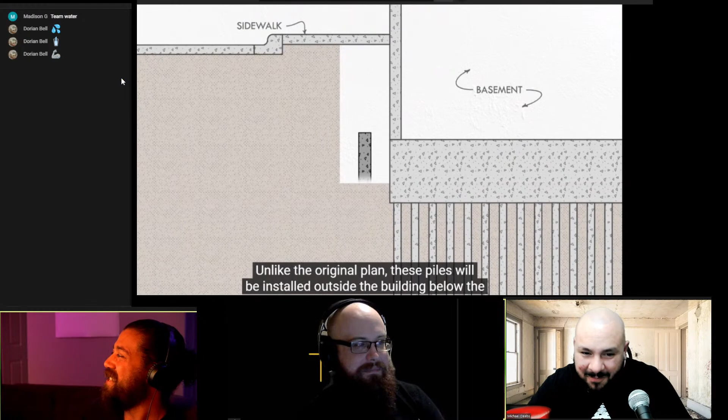52 piles will be drilled along the north and west sides of the tower, all the way down to bedrock. Unlike the original plan, these piles will be installed outside the building below the adjacent sidewalks, saving a significant amount on construction cost. An extension to the building's existing concrete slab will be installed around each pile, but not rigidly attached to them.

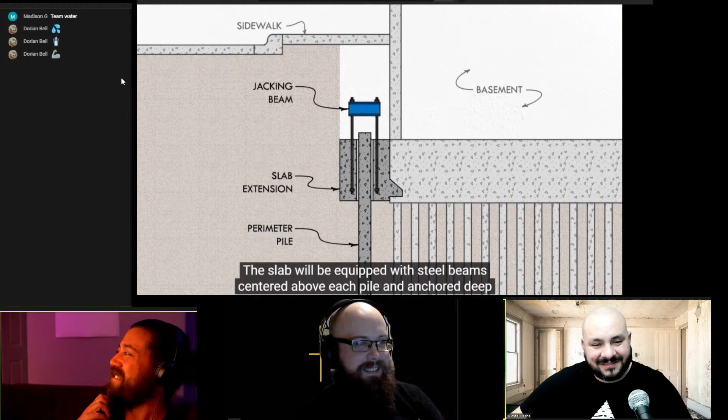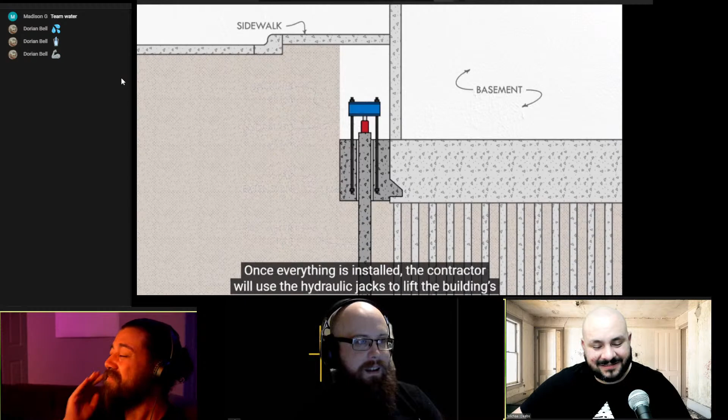Instead, each pile will be sleeved through and extended above the concrete slab so the building can move. The slab will be equipped with steel beams centered above each pile and anchored deep within the concrete. Hydraulic jacks will be installed between each of the 52 piles and beams. Once everything is installed, the contractor will use the jacks to lift the building's foundation, transferring about 20% of the load onto the new perimeter piles, meaning each pile will carry around 800,000 pounds, or 360,000 kilograms.

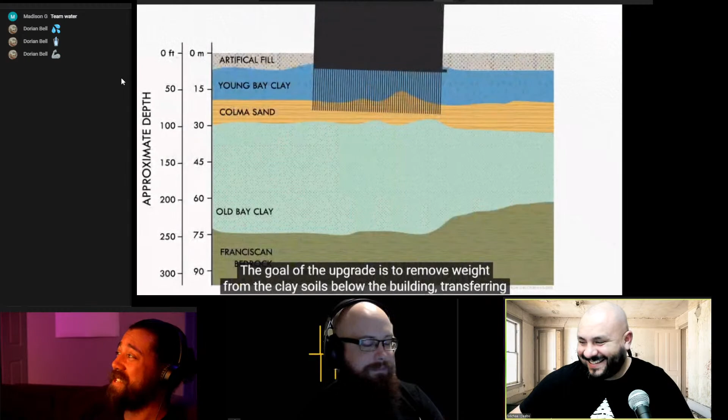The goal of the upgrade is to remove weight from the clay soils below the building. Look at this line, it just keeps going forever.

It's like almost 5 times the size of the original pile foundation. It's 75 meters, about 250 feet down to the bedrock, and that's how deep they're going to drill these things.

This also shows that they could have taken all of the original foundation pylons and done that from the beginning.

Earlier in the video, he discussed how this is normal construction in the area, so no engineers even thought to drill down further than they did for the original piles. That's what their job is supposed to be though, right? Like thinking ahead. But it's expensive. Yeah, that's what it all boils down to.

That means engineers are completely useless beyond waiting for an accident. Because after they come up with new technology, tradesmen and construction workers are the ones that actually do this shit, and they're the ones that work on the rule of thumb.

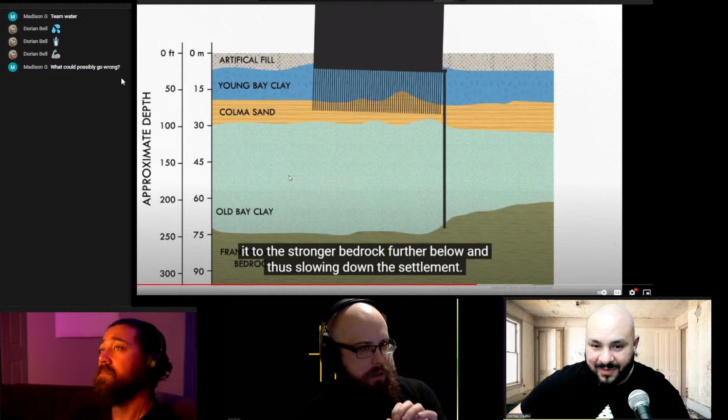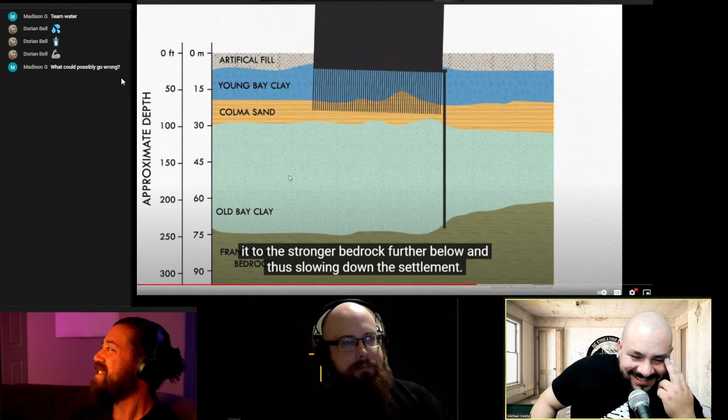The engineer of the Millennium Tower is a pedophile. Well, he's working with finance people, so none of them— none of it, no, wait hold on, I'm getting news about finance people. Are they building these? There's something going on here, guys, where they're drilling a bunch of small holes into the ground. Oh man, that's where they put the child bodies. There you go, this is a Wayfair cabinet in a building kind of thing. That's what's happening, let's continue this video. God, I'm a Q guy now, guys, I've decided it. Yeah, me too, probably.

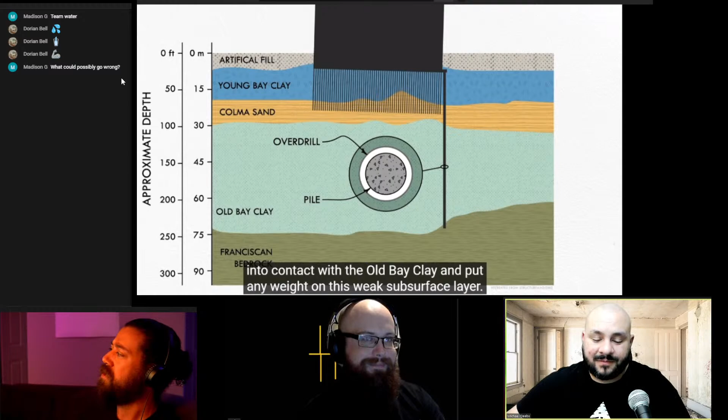Slowing down the settlement, the design requires that the holes be over-drilled so that no part of the new piles can come into contact with the old bay clay and put any weight on this weak subsurface layer. The annular space between each pile and the clay will be filled with low-strength material only after the hydraulic jacking operation is complete. Once the building is safely...

Wait, so they also have to sheathe it later? They're sheathing it with material that's just weak material. You want it to be weak so it flexes, or I guess that's the premise, but the problem is they're saying oh, we don't want the old bay clay in contact with anything. Well, the old bay clay is surrounding this entire thing, and we're already talking about a building that's experiencing shifting. I don't know, probably a problem.

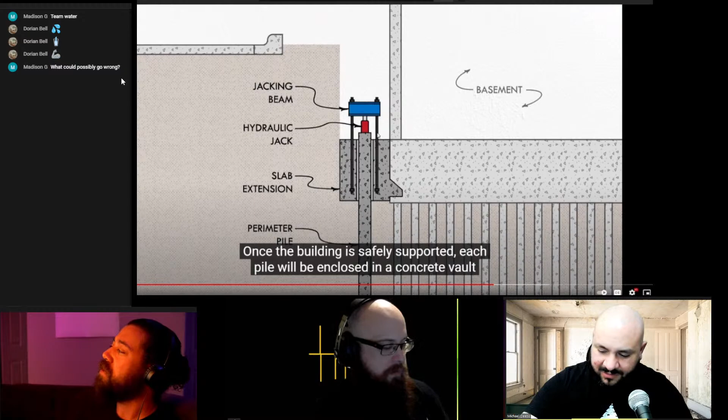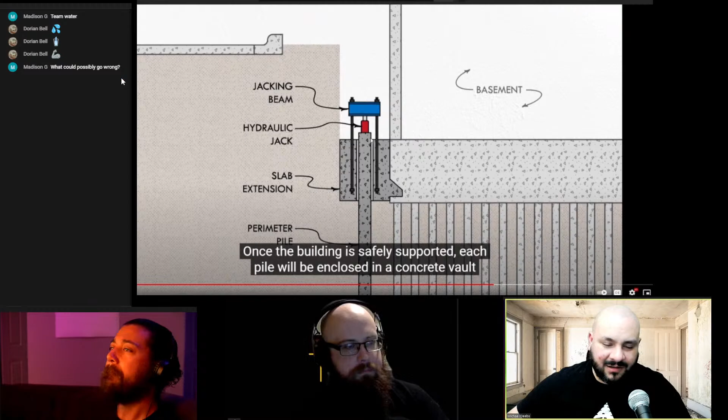Yeah, but cool, I love this jack it up solution where it's like a cartoon child—they're just like, what if we got really big jacks? What if I ask one of my fairy godparents for really big jacks, and we just jack the building up, because that's how things work in a cartoon, so it must work in real life. Of course. I'm writing this piece about buildings that's eventually going to be published, and I almost want to make the bet that sometime in the near future we're going to see this building fall over genuinely, and it's going to be a horrific thing that happens to the city, because this is clown show shit, and this clown show shit is not even going as well as they want it to, as we'll see in a video in a few minutes.

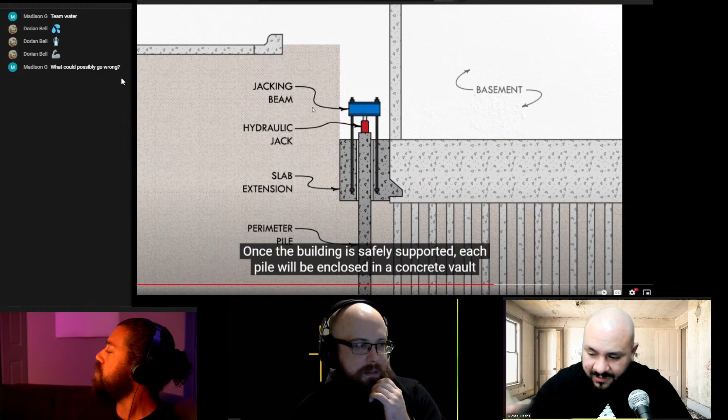No, so well, let's go ahead. Go ahead, Joe. I've got something that maybe the listener and or viewer might want to know about concrete, which is what all this shit is made out of, right? We love concrete here. Yeah.

So concrete has to cure. This foundation over here, this light gray area, is all cured and it's harder, right? So this new stuff is not going to be cured, they're going to have to wait for it to cure. Yeah, and I think it takes 5 years or more for concrete to reach its full strength. Concrete does not—well, it'll get hard enough to build on if you're building a reasonable structure within a week, that's usually the timetable.

This is going to take a very long time to cure properly, and their solution is we'll take this much younger concrete and put it in a slip joint inside the existing foundation, and then we'll have a big jack, and this big jack will push the building up, and then we'll be good.

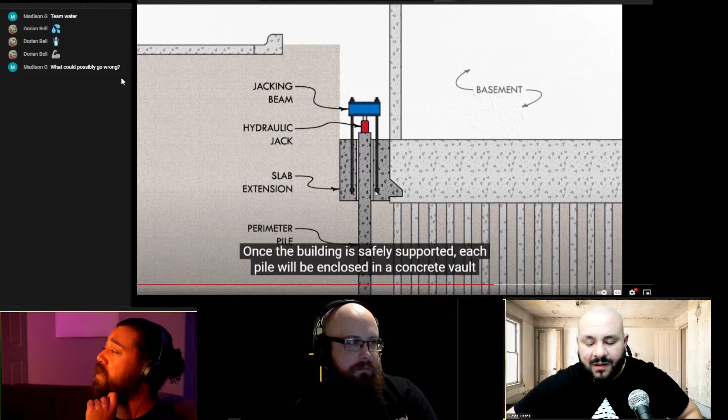Yeah, and I guess I hope that they're going to make this nub out of reinforced concrete. I mean, the whole thing is going to be made out of reinforced concrete, I'm sure, but hopefully. Because concrete only has good compression strength, not tensile strength.

Let's watch a little bit more of this. They're the engineers, we should trust them. Yeah, right, they never fuck up.

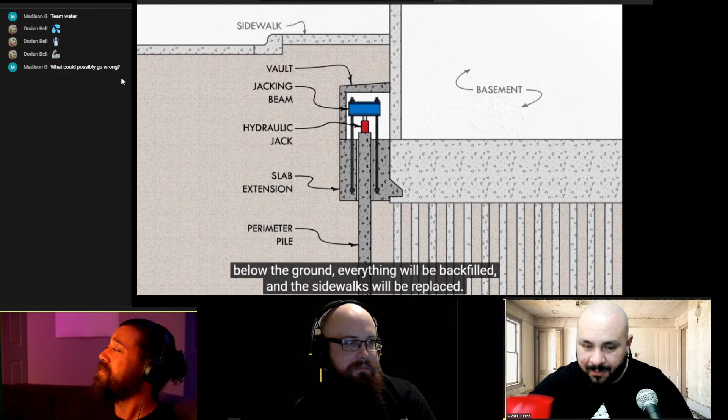Each pile will be enclosed in a concrete vault below the ground. Everything will be backfilled, and the sidewalks will be replaced, like it never all happened. If it goes according to plan, the settlement on the north and west sides of the building will be completely arrested. With less load on the original foundation, the sinking of the other two sides will gradually slow to a stop, straightening the building back to its original plumbness, but just a couple of feet lower than where it started.

Of course, expensive and innovative construction projects rarely do go according to plan, and this one's no different. The city of San Francisco and the design...

So what happens after it corrects and it starts to sink down straight? Do they have to dig up all the pylons, and then they just have like a garden floor, then a B1 and a B2? Yeah, it's cool, kind of an East Coast feel. What's eventually going to happen is they're going to have to build stairs down into the front door. Exactly.

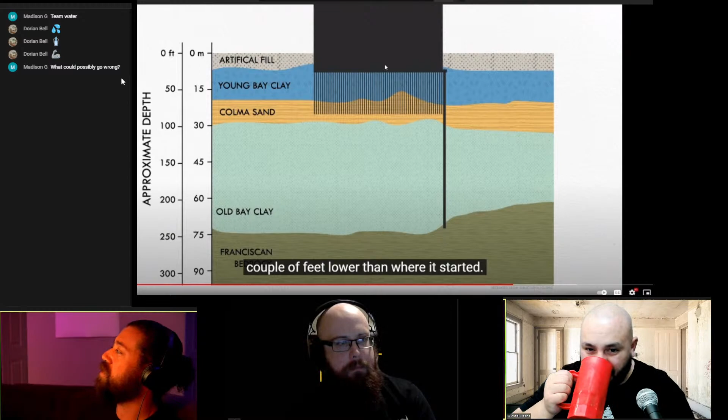Well, won't it start tipping in the other direction though, right? Because this is on bedrock, right? So eventually it's going to sink down. If the whole city is sinking, this thing is not sinking anymore, it's on bedrock. Well, the jacks are on like a slip joint of the concrete, so... But they capped it with backfill.

I don't know why you would bring that up. That doesn't seem very important.

Also, I'm sure that the jacks can only extend so far. So it seems like a very short-term solution, all things considered. At the very least, they're going to have to one day probably dig up those...

Let's say this works and let's say this holds. One day they're going to have to dig up those fucking vaults because, like you're saying, the other side of the building is going to sink and these jacks are going to be holding up the other side. So it'll just tilt a different direction.

And now all these people who have spent the last 5 years carefully setting their eggs in one corner of the counter so that it doesn't roll off, because that's where the tiles are just right, they're now going to have to find a different corner of the counter because it's going to be tilted the complete opposite direction. I mean, that's at least convenient because it's just going to be the opposite corner.

Well, so they'll figure it out, it'll be fine. I mean, that's assuming everything on the tiles is all completely perfect and standard across itself, which it isn't. Do you imagine that anything in this building is not perfect? I believe there may be some foundational issues here.

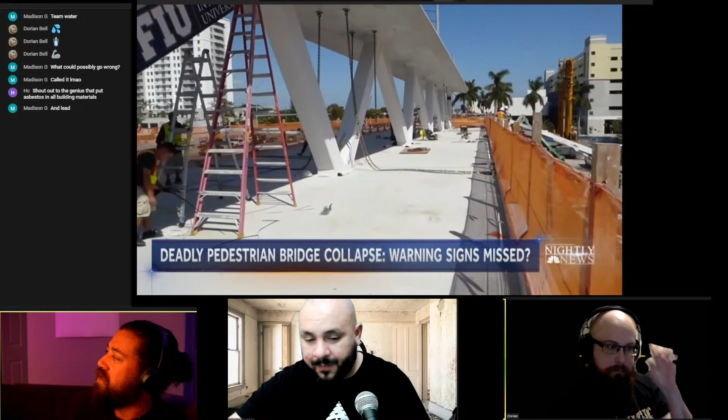But let's roll it out. Oversight of the project - the bridge itself collapsed. The NTSB chairman says the cracks seen days before the collapse should have prompted contractors and FIU to close the road, and that the Florida Department of Transportation should have done more.

Well, I don't think I've ever seen one where there's more finger pointing. Today, the university said in part FIU is committed to transparency and accountability. The bridge's designer denied responsibility, saying that a failure in the construction process was the fundamental cause of the collapse. The state called the accident absolutely heartbreaking, saying it had already tightened regulations to close public roads whenever there is a risk to life, health, or safety.

It makes you angry. But for the family of 18-year-old Alexa Duran, who died in the collapse, today's report... I'm sorry about your family, but we're talking about buildings right now. Yeah, let's move on. So we'll find out later the construction process and how it changed that they think might have contributed to it.

Yeah, let's see here. So, in fact, there was an engineer that had left a voicemail warning them about what was going on two days before it happened, but apparently it was ignored. Well, they claim they didn't get the voicemail. Yeah, actually all of our whistleblower voicemails go into the garbage. So yeah, they're like the algorithm said we don't listen to those. Yeah, no, and in this article, I believe their excuse was like, oh, it was a landline, and the person responsible for that landline was out of town on a project or some bullshit.

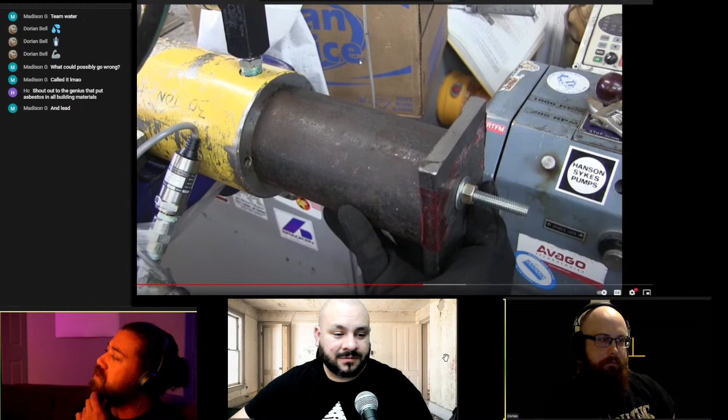So here is the world's worst dildo. I couldn't figure if I say best or not.

Well, it's somebody that's kind of done a deep dive into this bridge, and they actually give a pretty good example of what happens at a smaller scale to these tension cables. For the listener, he's got a hydraulic press that he's put a piece of steel all-thread through.

That's what I said. Yeah, and what? That's what I said, not what he said. It's a dildo joke again. Sorry. And he's now going to stretch that all-thread and show you basically what happens when it snaps.

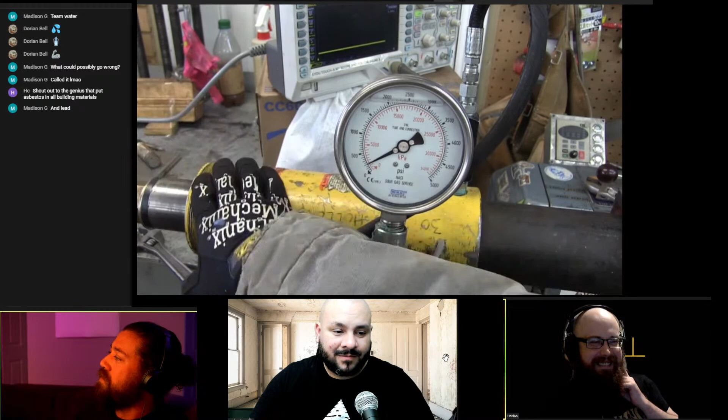We got the cylinder extended, it's pulling on the rod. We're at 200 psi, so fuck all in a big ship. This thing will do nominally 10,000 psi. I made a couple special modifications myself, so it'll actually do 12,000 psi, which is about 8 kilometers down Mariana's Trench, pretty deep, say 5 miles, lots and lots of pressure. This thing will kill you right dead, quick, fast, in a hurry if you're not careful. Really don't want to get killed by this fucking thing. What's that? I just said effing.

I like how he has his fucking shit propped up on a box. Oh yeah, that's how you know he knows what he's doing. Yeah, this is real engineer shit. Everything's sitting on the like clean wipe box. Yeah, he didn't engineer a special table that fails 30% of the time. Yeah, well, this works, done.

Fuck me. Now lean in close and careful, really listen. This is going to be important. We loaded this super quick, about 1 second, 200 milliseconds in the delineation, so roughly 1 second. We can see each pulse of the pump, and we are straining it. We're putting a lot of force on it, and then the force levels off, the pressure levels off. This level-off area is going to be very important.

And so this hydraulic press is simulating the tool that they use to stretch these cables and adjust them. And he's showing a graph where it's showing the level of tension on it until it just suddenly drops. It kind of levels out and then suddenly loses all of its structural integrity.

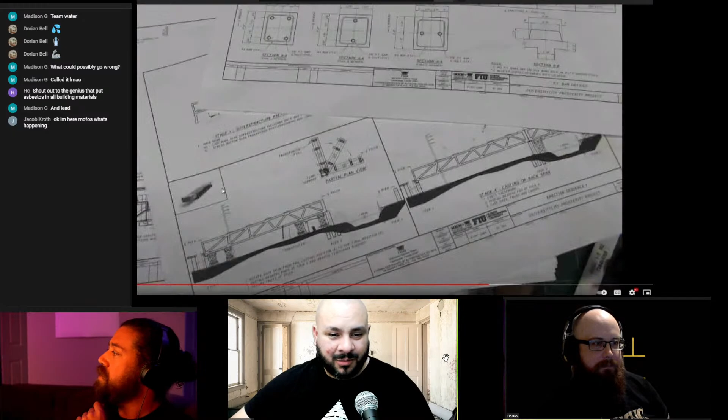Things break eventually. I'm gonna skip ahead a little bit. They do, and he's got a slow-mo here. Oh hell yeah, that's not good for oscilloscopes. I want to watch the slow-mo. Here's the slow speed one I wanted to show you.

Super salient point here: when the rod fails, it comes fucking whipping out of there. Now we go back to the screenshot of the failure.

Is he Canadian? Is that what's going on? Yeah, I think it might be Canadian. This guy rules. Oh, he might just be... he did say meters, which makes me think he's Canadian. But then I think he could just be a New Englander. He could. He seems like some kind of black-pilled engineer, or like I said, I love him. That just read engineering books. He seems cool.

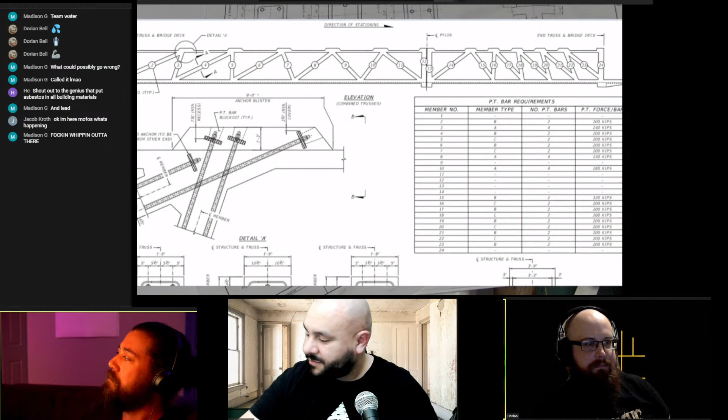Now, I had a good look at all the footage, and there is none of the blisters with the pretensioner, the PT rods — none of the rods have come out. So there we go: the rod breaking is the straw that broke the camel's back. Now the thing is, why did the rod break? You always got to ask yourself why. So now we know why the final collapse took place.

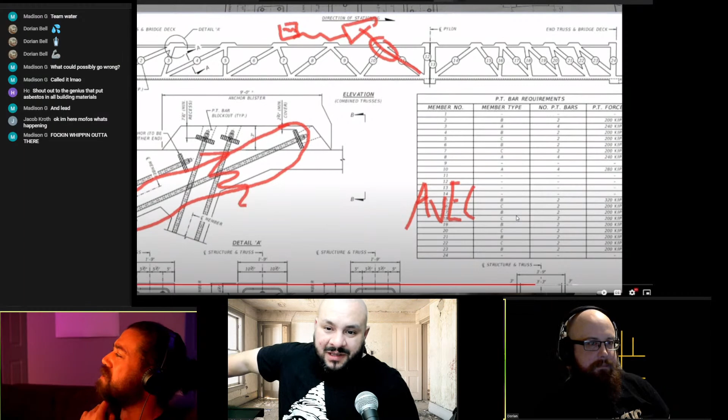Math shit. Can we look at the top right there just real quick? Yeah, that's how the fucking trusses were built. It's a bizarre construction, just to be asymmetrical — they built them that way. It's fucking asinine, doesn't make any sense. It's stupid, it was all aesthetic.

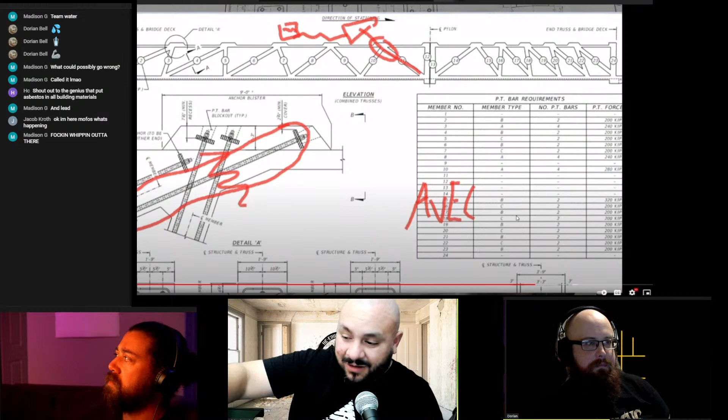And if they maybe built a regular truss bridge, this wouldn't have happened. But they wanted all the angles to be weird and obtuse — that's actually why they did it, strictly for aesthetic reasons. Which is so funny because it makes it uglier too. Yeah, exactly, it's a very ugly bridge. New architecturalism.

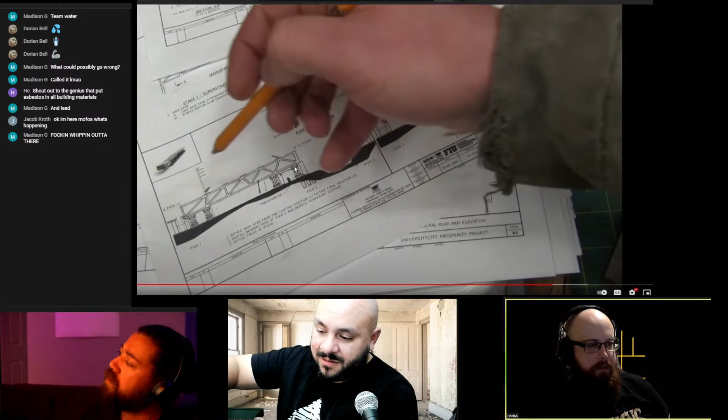And you can see in that drawing too, all the angles are fucking different. It's insane. So I'm sure that has no carryover into the way that force is also kind of equalized.

If you look at this sketch, and if you remember the bridge, this extra column here, they were pulling on this cable right here. This extra column that is in the picture, there's one column right next to the other.

It turns out the engineer put that column on fucking garbage ground. Basically ground that cannot be built on.

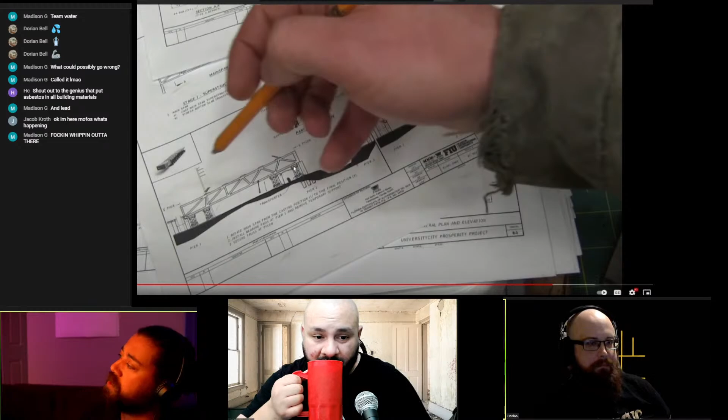So real quick, in the middle of the project, that engineer was blaming construction procedures for the damage. Well, it was an engineer that did the math that day to keep the construction rolling, and they moved that pillar over here between these two lines that he's marked on the paper.

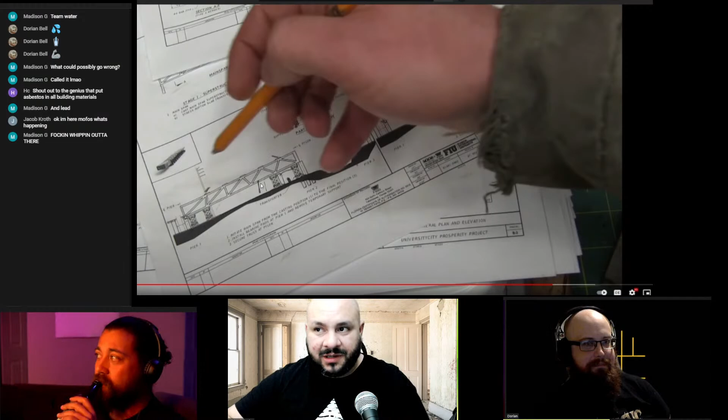And it was a change because, like I said, they didn't do the engineering for the various stages of construction. They did the engineering for the final construction, and at the stage of construction they were at, they were like, okay, we need to move this pillar over here so it puts the proper tension on these things. They were kind of just flying with it essentially, and that turned out to not work.

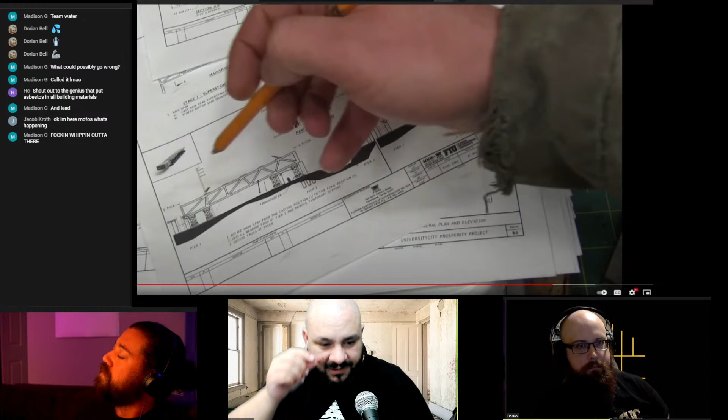And also there was a cement barrier already existing, a lane delineator, so it would have made the space between these two columns an impassable lane that nobody could fit through. So they failed in not closing down the streets, and then they closed down the streets for a long time.

But here's an example of a pre-tension relief cable busting, which basically is: they make a frame of cement, set the rods, tension them, and then pour wet cement on it. But we'll watch one pop in the middle of new construction.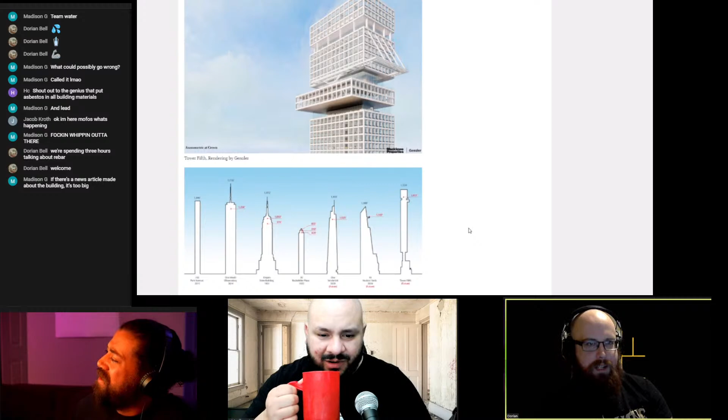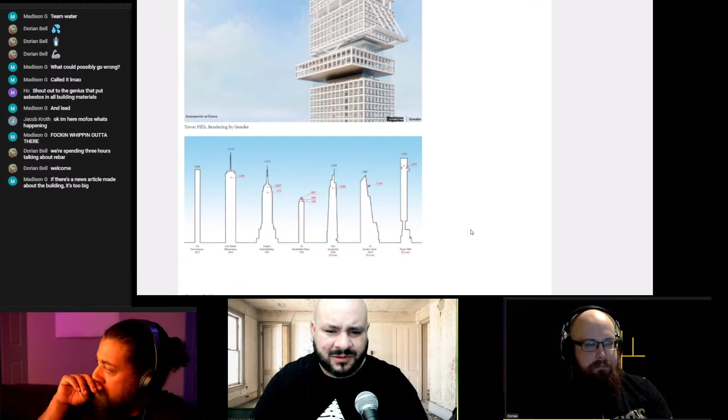Amazing. So the majority of the tower reaches this real weird skinny point where it cantilevers out on both sides, goes up, cantilevers out on one side really hard, and then goes up. Continue.

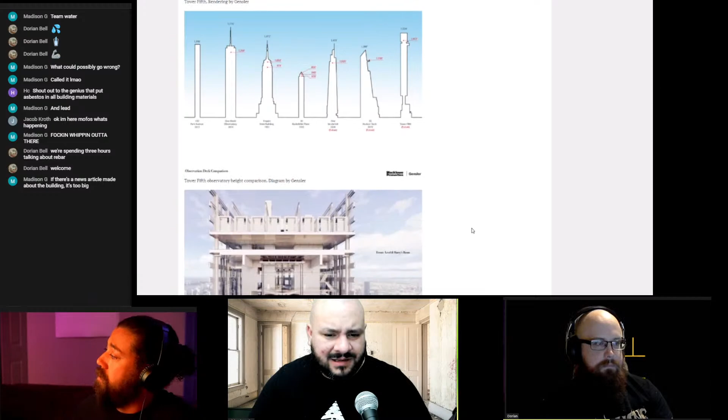It's just more renderings. Why do you need to do this? You don't need to do this. Well, it's all sales. Everything is sales. It's just interesting, so they think they can make sales off of it.

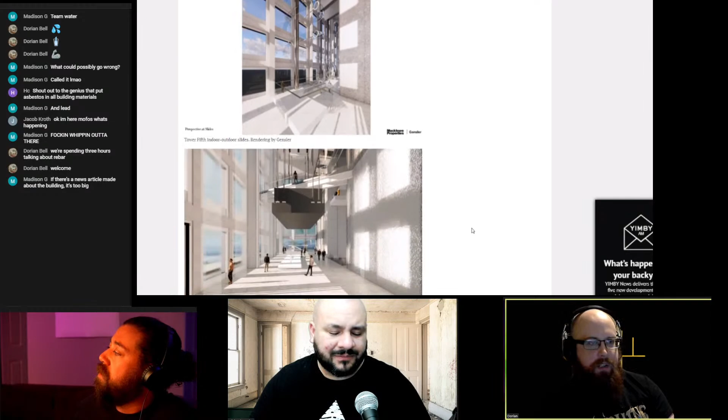Man, I should have kept the Society of the Spectacle open from two episodes ago so I could start making quotes. Yeah, this is cool, dude. I'm really glad. This is made by the same people that made 432 Park Avenue, which we know is a very successful and good building.

So we have one last link that I wanted to share, a video, because we've talked about this in the past and why Congress people shouldn't buy or sell stocks. But this is Nancy Pelosi getting very angry over being called out about stocks. There's some lead up to this which I think is important because these gentlemen explain the problem here pretty well, except for the weird guy with the squint. He's a free market capitalist kind of guy, so he can fuck himself. But go ahead and play it, John.

Business Insider completed a 5-month investigation into every member of Congress on their financial conflicts and transparency, and found dozens of lawmakers in violation of the Stock Act. And it's not just lawmakers. Insider found that at least 182 high-level staffers on Capitol Hill have missed deadlines to disclose their personal stock trades. The violations are bipartisan, though, with late reporting split down the middle between Democrats and Republicans. House Speaker Nancy Pelosi was asked for her reaction to Insider's stock trading investigation, where she defended members' right to trade.